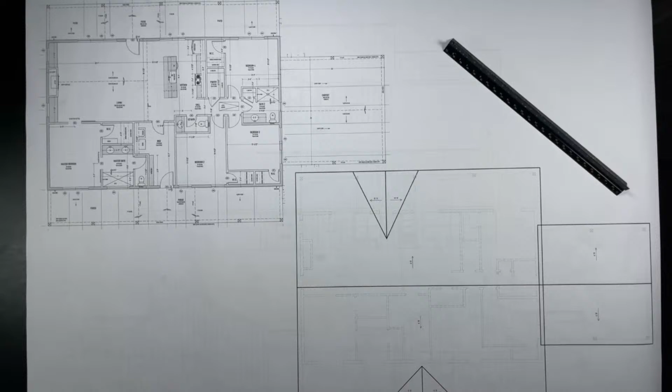I am a person who is obsessed with framing. I am here to teach you guys everything I know about how to take a plan like this, put marks on it so that we would understand a framing layout. That is why I'm here. Hopefully, that is why you are here, because that is what I'm going to go over today. Let's get right into it here.

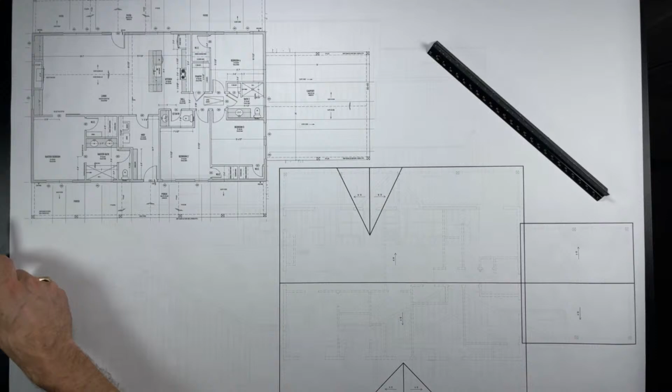This is a scale. I'm going to use it. It says 1/4 inch right here. This is how I know my lengths on my plan. Everything is printed at 1/4 inch per foot. So I'm going to use this to figure out my real sizes here. Okay. So the first thing, we're going to start from the top of the building and work our way down because that is how you work through a house.

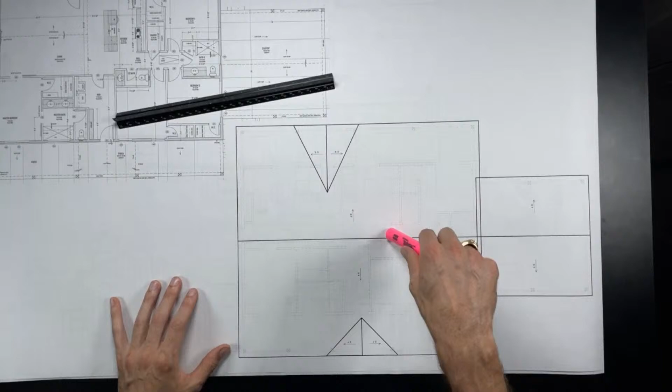This is the roof plan. From looking top down through the sky, you would see the outside edge of the roof, and then you would see the ridges and you'd see valleys, right? That's what these lines represent. So this is a 6/12 pitch running down the back of the house. This is a 12/12 pitch right here. They would merge along this line in this valley, right? Okay. So that is how that works.

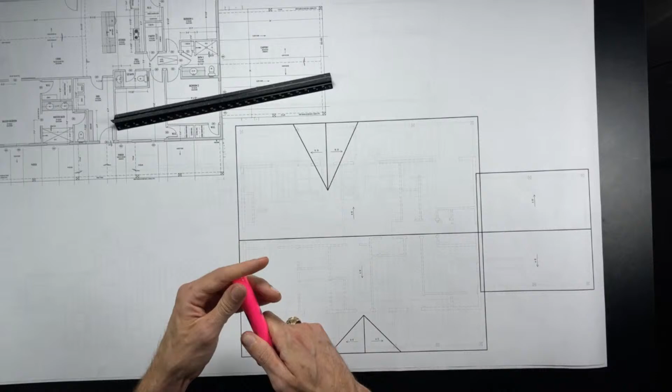What we're going to do is we got to figure out first how we're going to hold up our ridges, hips, and valleys. So let's take a look with yellow first because this is less obvious. So here's a ridge. We got to take care of this. We got a ridge over here. We'll take care of this. We got a ridge right here, and we got a ridge right here. We got a valley, and a valley. And we don't need to worry about holding up the outside edge of the roof because there's walls for that. Okay.

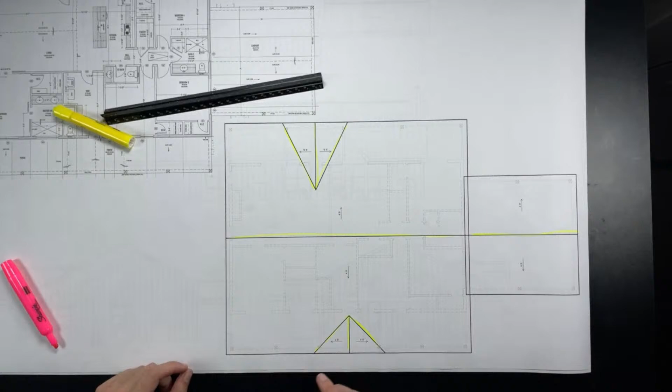So before we really look at the ridges, hips, and valleys, we're going to think a little bit about our rafters on this house here. Okay. So the rafters are the dudes that are making the main diaphragm or the main surface of your roof. They would go something like this. If you're looking top down and the house was framed up with no sheathing on it or anything, it would look like this. Okay, so there's some rafters.

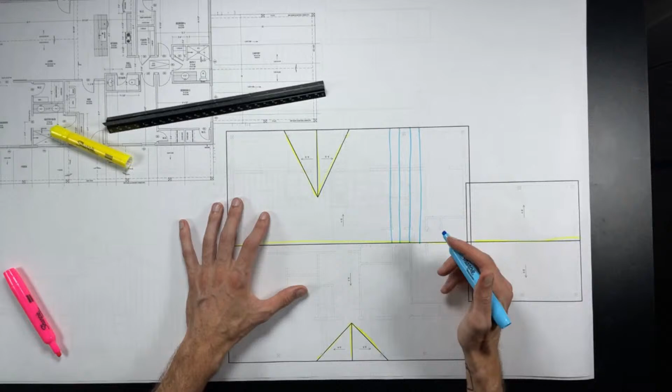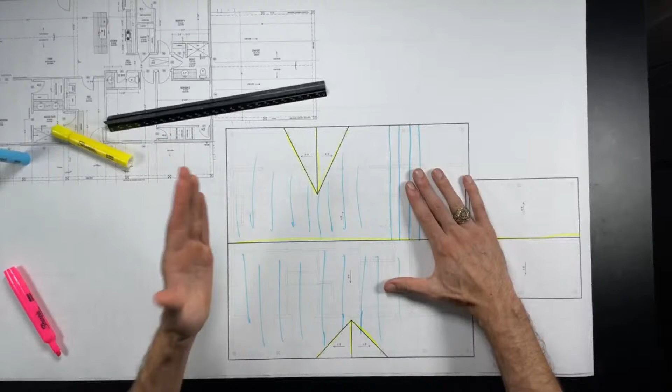So they're going to go this direction on this side. They're going to go this direction on this side. They're going to stop with these valleys, and these valleys are going to be real. Actually, we're going to get to that. But that's what the rafters are doing. And so what I need to think about, because this house is so simple, this roof is such a simple, clean, like farmhouse, just like boom, gable end, ridge right down the middle, and two cute little pop outs. We're going to talk about that.

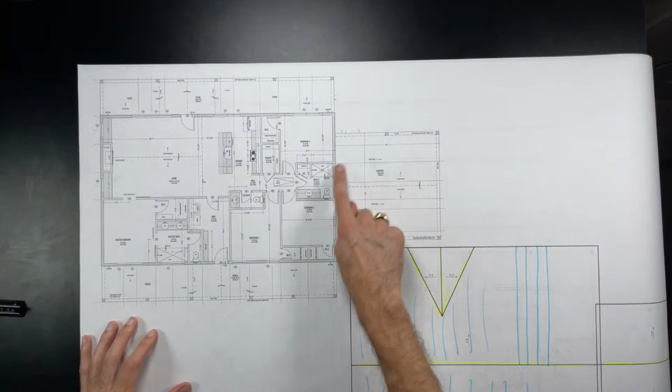And I forgot to give you guys the tour. Let's have a little tour because I printed out these plans. So let's take a look at what I got. Okay, here's the floor plan. We got to wrap our minds around this house. What is going on in the house? Okay, we got a carport, vaulted ceiling. So there's no flat ceiling in the carport. We got a porch. Looks like it's 9-foot ceiling here, 9-foot ceiling here, and vaulted right here up to the peak. Centered on this door.

That makes sense. On the back porch, we have 9-foot and 9-foot. Again, another vaulted ceiling up to this peak. We have a vaulted ceiling at a 6/12 inside here. But that's actually going to be framed totally separate from this. So that's a new thing for us, I think, on this channel. So we're going to talk about this guy. We're going to have a flat ceiling. This line says the flat ceiling starts here.

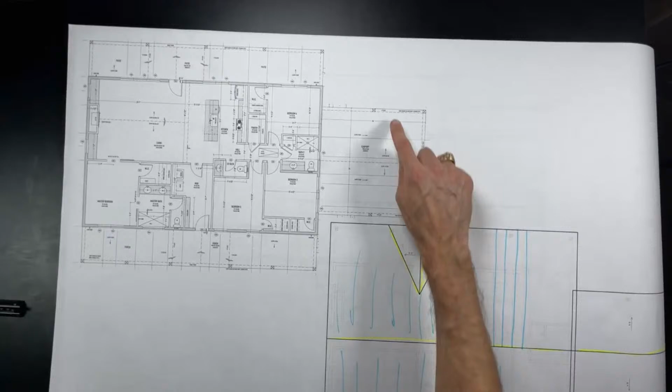10-foot ceiling. All the rooms are 10-foot ceiling. So the whole house, boom, is 10-foot ceiling. Porches, 9-foot ceiling. Carport, it's vaulted ceiling, but we don't know. Oh, it says 9-foot plates out here on the edges. So that's where the roof starts.

Now, if you had any doubts, you would look at your elevations. All right, here's the front of the house. Somebody put here on the plan, look, 9-foot plate height, boom, all the way across. You can see all the roof plane is in a line. There's nothing popping up or sticking out to make that different. Look at the back of the house, same thing.

We have a 12-12 on the back. Not much else is different. And then we got the left and right sides. Looks like this 9-foot plate's just all the way across, so the 10-foot ceilings all exist up inside this space. So you're not going to see anything popping out.

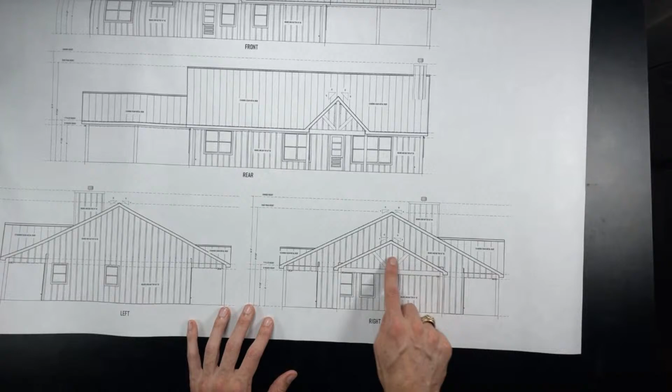There's nothing funky. And then here's the right side where there's this open carport with a nice, beautiful cedar thing that people like to build. Okay. So those are the elevations. That is the elevations sheet. So moving right into this here.

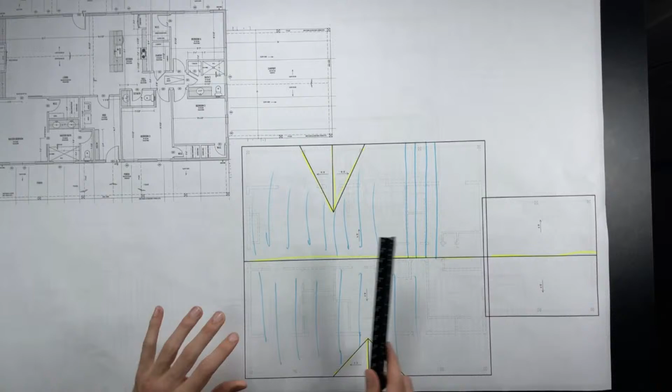If this is our roof, we got this side going down to the back, this side going down to the front. What are these rafters going to be? That is the question. So where are they framed? First of all, they're going to start on the outside porch wall on both sides, and they're going to run all the way up the roof until they hit the ridge. How far is that? If they were totally unsupported from the wall to the ridge, it'd be 24 feet, almost exactly.

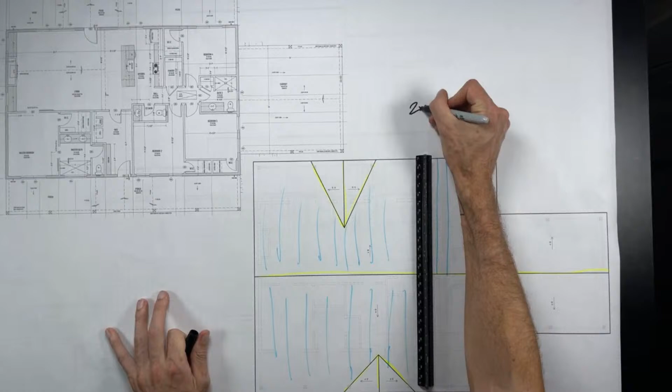That is too far for a 2x6 rafter, 24 inches on center, to span. We can go about 11 feet horizontally on the plan view before we need support. And so we also cannot support this in just one place in the middle either, because if we cut 24 in half, it's a 12-foot span plus a 12-foot span, and that's still both over 11.

So what I'm thinking here, folks, is a pretty common strategy, which is that this is a 6/12, and we've got quite a bit of height up in here. So typically you're not actually going to bump up the whole roof to 2x8s. What you're most likely going to want to do is run a framing support line along both the perimeter walls.

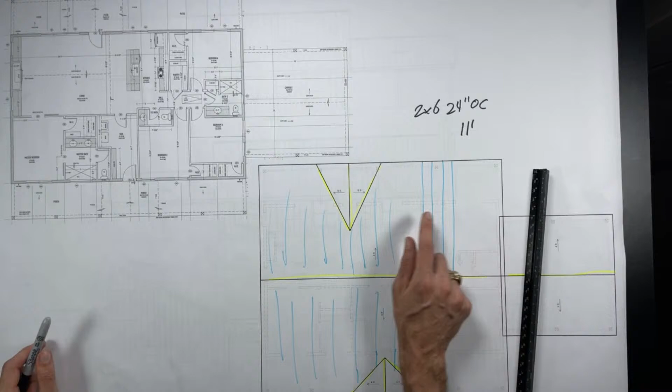So over here on the floor plan, we got exterior wall going all the way through, exterior wall going all the way through. So we'd run support right on top of that because it's super easy. We don't need beams. We don't need nothing. Let's add a line for that. We would call this a purlin line. It's representing a board the same size or greater than your rafters running lengthwise. And it's a support point.

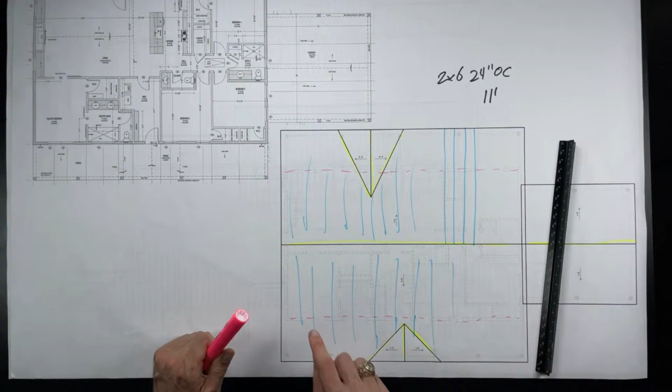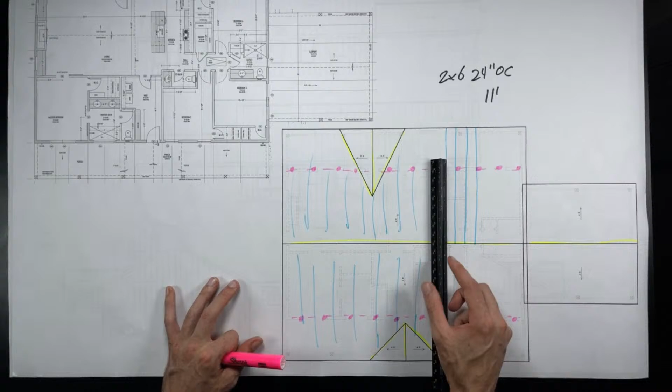And so all the way down this thing, we'd say every 4 feet, you're going to brace this sucker straight down. We'll talk about what goes on underneath here in a second. You would just do that all the way down, and you would not be concerned with much else. That would be super simple. What that does is it gets us over the porch, because the porch spans like 8 feet. But now from the purlin to the ridge is 16 feet. If we break that again, then we can hopefully make some stuff happen.

So along this whole house, we pretty much have this wall running through the middle of the house. I want to know if I could use that wall to bear the load of my roof without having to add any extra beams. How do I figure that out? We have to use some geometry, but we're going to figure it out, folks.

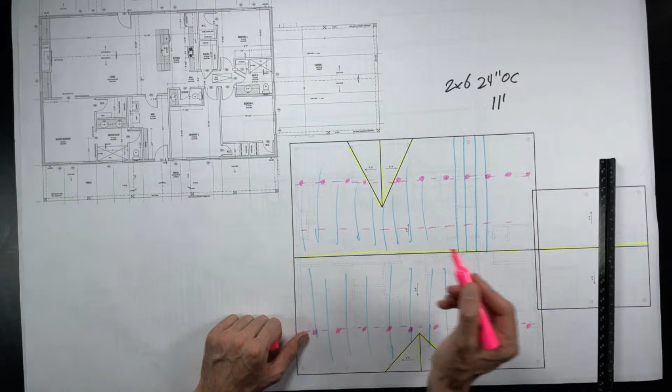First thing I got to know, starting on the back one, what is the max I can go? About 11 feet, so it's going to be about there. If I make that distance consistent across my plan, that's about where the purlin has to be. Now, in the worst case scenario, my supports need to reach from here all the way to this far wall, which is about 7 feet on the plan horizontally. So how would I know if I can run 7 feet horizontally?

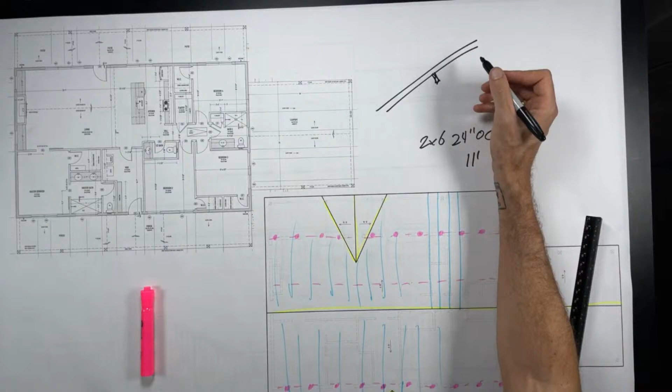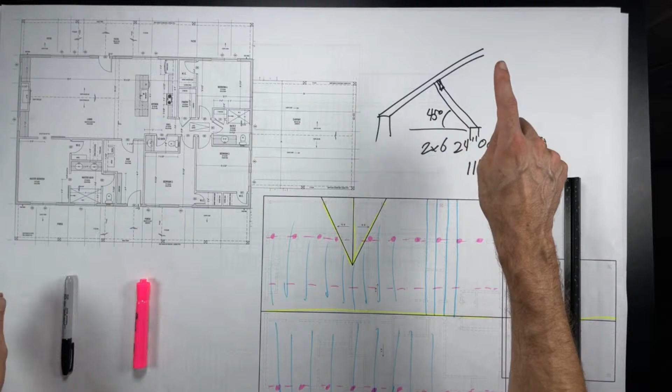We would use the rule that you can run a brace in a roof. So here's a roof. If this is the purlin we just drew, running the lengthwise of all these rafters, you could add a brace to it that braces down to a wall. This angle can be 45 degrees or more vertical, but you can't go slacker than 45 degrees without doing weird engineering. So how do we know how far we can reach? This pink part is the purlin location on the plan, and my wall is right here. The distance between those two is basically 7 feet.

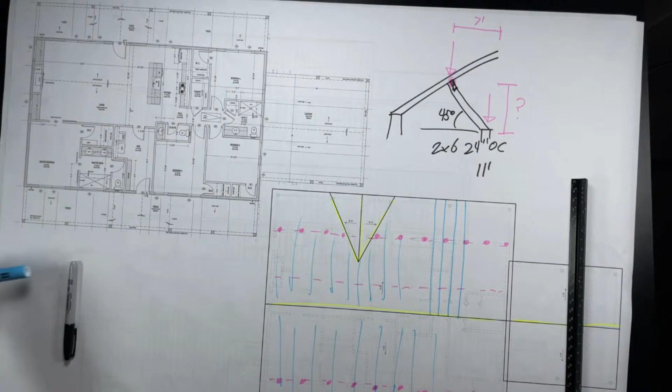Well, if I figure out how high I am from my support point to my wall, then I can figure out how far I can go. So how do I figure how high I am? Well, we do that by using the geometry of the roof. First of all, how high is this wall? Well, the entire inside of the house is built with 10-foot ceilings, so that wall is at 10 feet. We know that's the case.

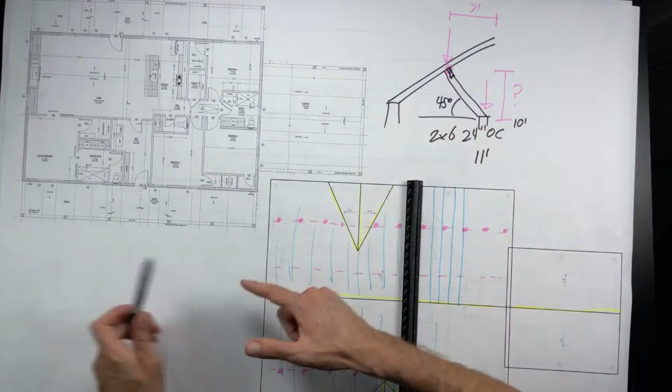All right. Now, how high are we at this purlin? How do we know how high we are? Well, we're going to start at the inside of the wall right here, and we know that this roof is a 6/12 pitch. So that means for every 12 units horizontal, we're going to go up 6. So we would just figure out how far over we are going to get to the purlin line, right? I don't care where the wall is. I care how high I am this way.

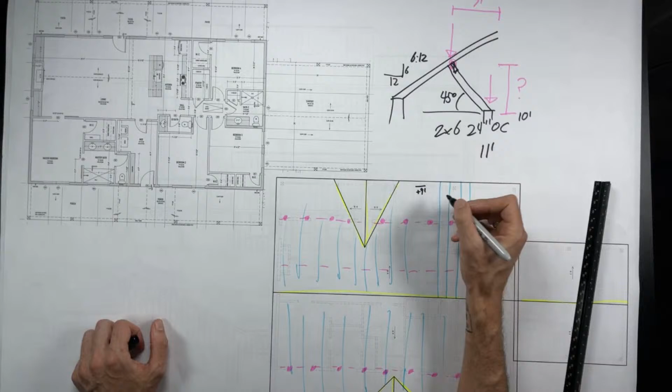So from the wall to the purlin is about 18 feet. So 18 is 1.5 of 12. So I'm just doing mental math in my head. You basically just do a ratio. If I go over 18, then I'm going up 9. All right. So from this point I'm going to go plus 9 feet. That is how much height I gain right here.

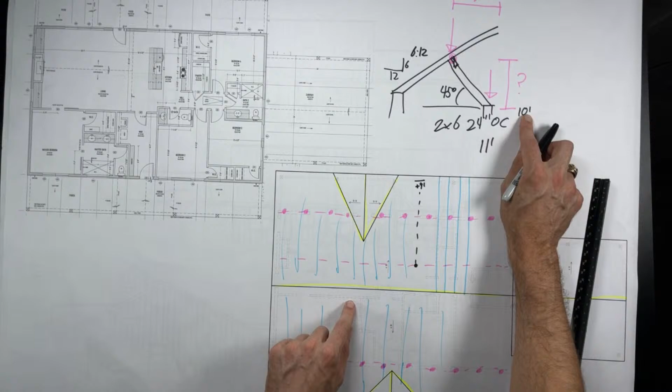Now, what that doesn't tell me is I'm not 9 feet above my wall necessarily, because this roof was built on a 9-foot plate on the outside of the house. So from 9 foot tall, I went up 9 feet, and now I am at 18 feet, which puts me 8 feet above my 10-foot wall at the inside. And because 8 feet is more than the 7, I can actually reach all my braces all the way over to this wall, and I know I'm good.

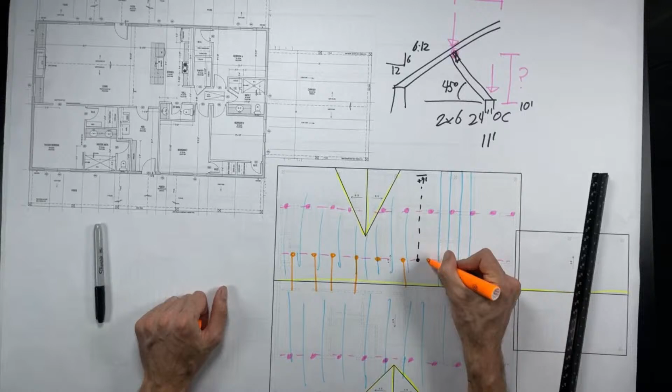Okay, so that one will just go down the wall, but I can actually draw it like this. And these braces are going to be pretty close to a 45, but it's not going to be a big deal because it all works out. The math works out. So I could just basically draw my braces. You may or may not be able to see these gray walls, but I'm just kind of putting the weight down there. All right, so that covers the back side of the house, except for the porch. We'll talk about that in a second. These little gables. Anyway.

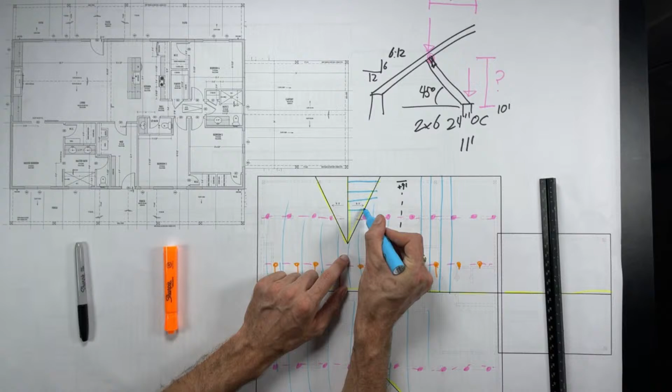You know what? Let's talk about that. Okay, so this is a vaulted ceiling back here, and the ceiling is vaulted to the same pitch as the roof. So what's going to happen is you're actually going to frame this. The rafters would look like this for the gable. They're going to go down like this, and they're not going to stop at the valley. They're actually going to go all the way to this wall in real life, at least to where the house is. Okay, and that's because you're literally making the ceiling of this patio room. So you got to do that.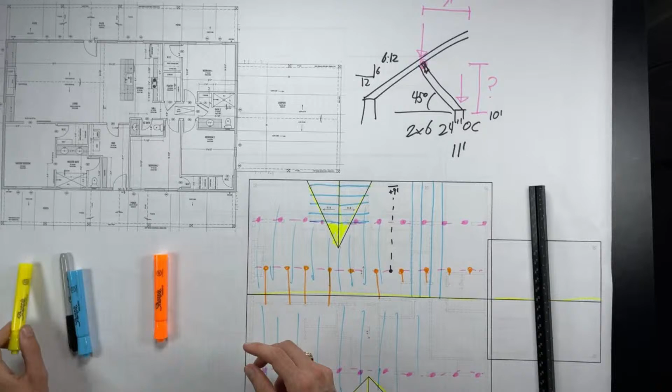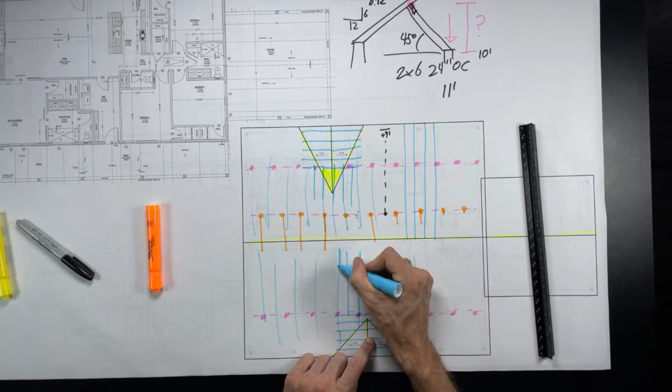So you built that. In this little area right here, this would be overframed. Okay, so that area is going to be filled in with blocking after you frame the main roof structure and this gable structure. And the same is going to happen up here. Rafters are going to go like this. You know, they're going to make this vaulted ceiling porch, and then these rafters are going to come down, and they're going to stop at this exterior wall, like so.

In this case, there's no overframe. Not really. I mean, there's a little bit of overframe from this part. Technically, yeah, actually there is overframe, but I'm not super concerned about that. So that's what's going on there. Easy enough. And those are really short spans, so we are not concerned with the length or the spans of those rafters. It is less than 11 feet.

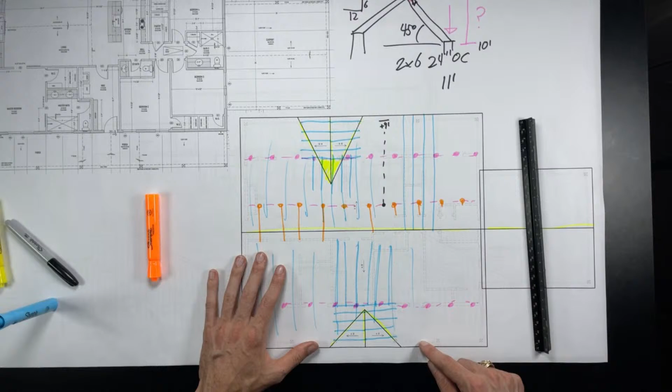Let's talk about this side. We've got the rafters covered from the front wall to this wall. That was only 8 feet. And it's too far from the ridge to this purlin. That's like 17 feet, too far. So we got to put another support line in here.

We happen to have walls all over the place in here. And so I'm just going to put this in here about midway because I don't really care where it is, because I know I've got support everywhere and I know I'm pretty high. I can reach up and solve all my problems. You know, these would go about 4 feet on center down the purlin. If I was a framer, this would be a nice, easy house. This is sort of plus or minus 4 feet on center, but that's what you're supposed to do.

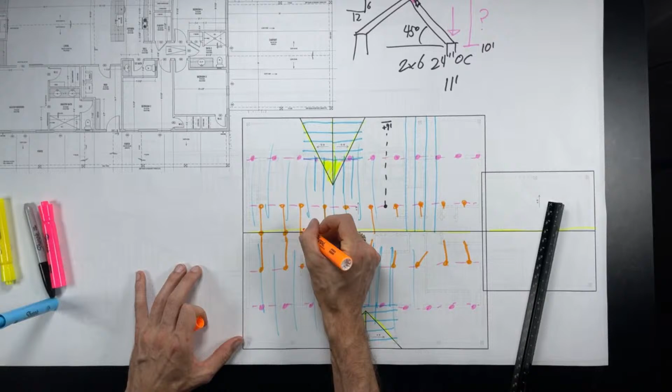Okay, so that would support this whole part of the roof minus the ridge. Haven't talked about the ridge yet. What's the secret of the ridge? Well, every 4 feet, we're going to want to support down to something, and we've got walls all over the place. All right, so the circle I'm drawing represents where we attach to the ridge, and the little dash I draw represents, hey, where does a brace land? Right, and it's going to land wherever you have a wall. We got lots of height up in the attic up here, so that would be super easy to do.

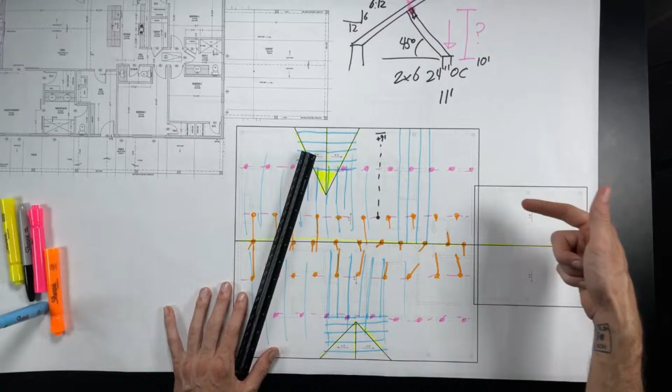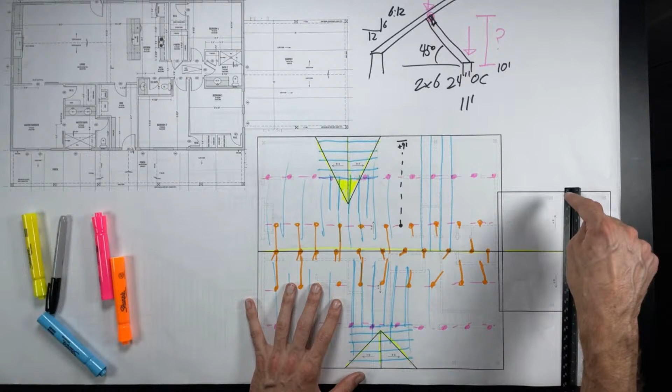Now, let's talk this little chunk, this little nug that sticks out here on the right. What is going on with this? Well, that's a vaulted ceiling, which means the rafters are the ceiling in this particular case. And we know that because of the view we looked at where it's like, oh, I can see the siding in this photo. Like I can see through this, which means the only piece of structure could exist in this zone. Therefore, I've got one shot, which means I can't put beams in. I can't put any of these purlins or braces in. I have to span from the wall or beam up to my ridge, which in this case is a little bit over 11 feet, and I don't like that.

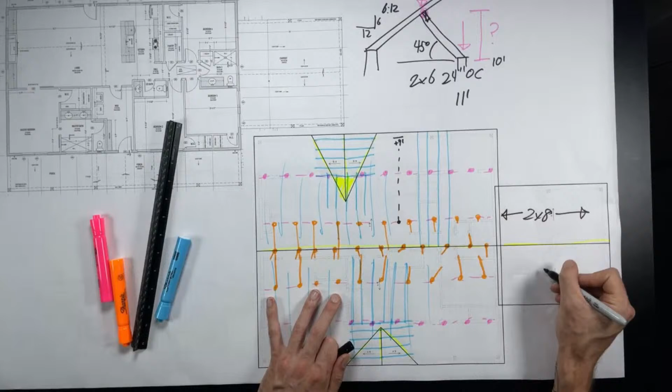Luckily enough for us, these roof planes are totally separate from each other. See how this upper roof does not interfere with this guy down here. So we could easily just bump up this whole section. We would say, hey, this is all 2x8s on this right here. And then the span would be totally fixed. Rafters would go like this. It'd reach just fine. And of course, if we needed to add beams in, which we do, we'll do beams in orange here on the roof plan.

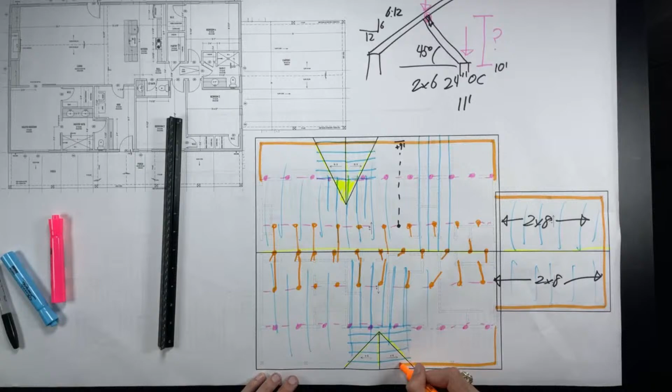There's beams wrapping the entire porch. That's what holds the roof over porches, is beams on the ends. Beam all the way down. And because we got these vaulted areas, something has to catch the vaulted ceiling. So there would actually be beams right there. Same right here. Okay. So for the roof, that's all we need to do. Pretty cut and dry.

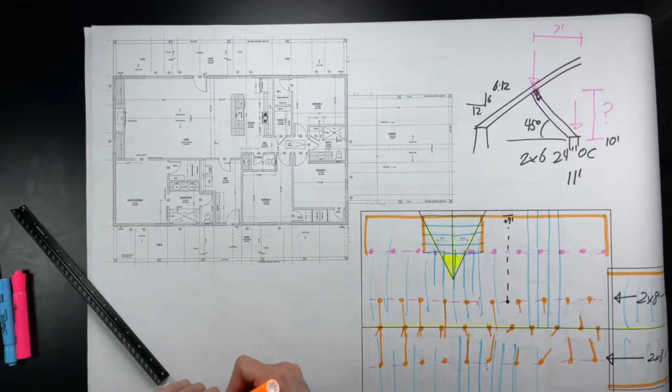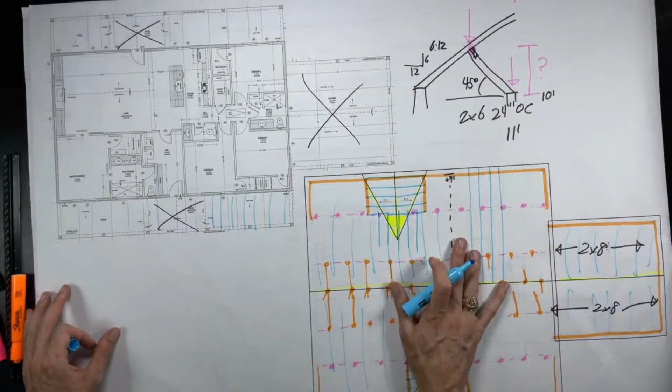What about the ceiling? Well, super easy. This ceiling is done because it was the roof. What's going on in here? Again, this ceiling is done because it was the roof. This ceiling is done because it was the roof. What are we going to do everywhere else? Flat ceilings everywhere else. Guess what? We're in line with the rafters. All these roof rafters, by the way, are going front to back across this whole big house. So we're just going to shoot these guys on in here. And what we're looking for is, are there any spans over 14 feet? Because a 2x6, 24 inches on center with regular ceiling weight, no attic loads, can go about 14 feet horizontal span without needing extra supports.

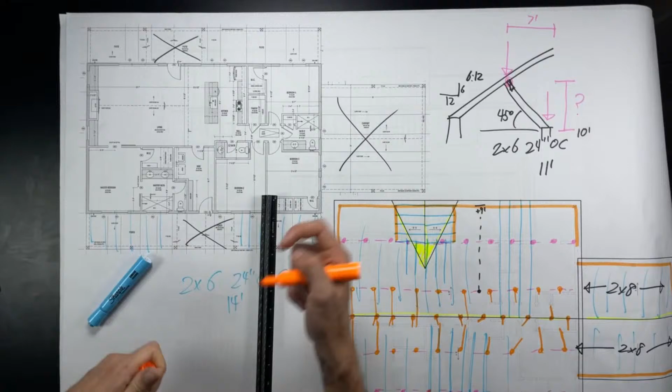So I'm going to look through here and check for that. That one's overspan. So I would add probably a little double 2x6 if I was framing this up. I'd put a little double 2x6 right there. This one, yeah, it's a little bit overspan. So I could either turn all the ceiling joists in this room. Well, I'll probably just do that. I would just turn all the ceiling joists in this room. These could go all the way across. Yeah, this can go all the way across. We can cross this room. We can cross this room.

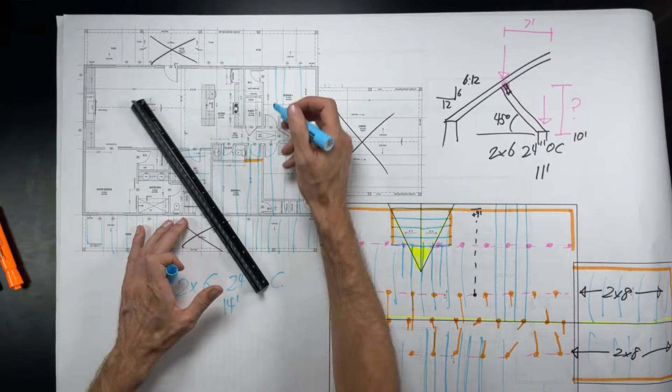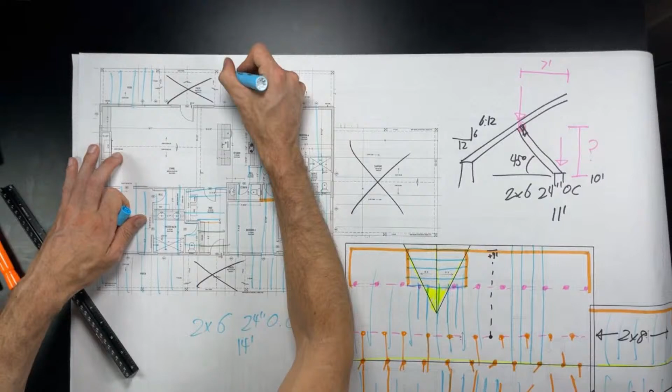Let's check for 14 feet here. Yeah, we're good. We can cross that. We can cross this. We would cross the hallway the short way. And then this open space in the kitchen, we'll deal with that in a second. We can cross the bathroom in the short direction, and then we can go this way. Let's check for span. Yeah, we're good. We can go 14 feet here. So that covers the ceiling. Let's talk about back here. Again, this is short. We're in line with the roof. We're going to run our ceiling joists just like that. We wouldn't put ceiling joists inside the fireplace, so we can leave that alone.

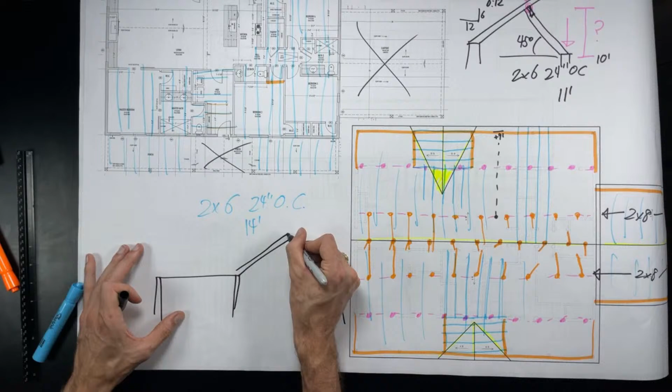Kitchen. Okay, let's talk about what's going on right here. There's a 10-foot ceiling, and there's a 10-foot plate vaulted ceiling. All right, vaulted ceiling. What does that mean? Let's draw. It means here's our kitchen ceiling. It sits on 10-foot tall walls. This would be a vaulted ceiling sitting on 10-foot tall walls. All right, your ceiling members are just going to go up to the peak just like so.

Now, what you need to know is whenever you vault the ceiling like this, unless you're going to do cool framing details like hidden scissor trusses and cool stuff, which I've seen and you can do, but don't tell regular framers to do that because they're going to ruin your house. Most people nowadays are just going to throw a nice big beam right up here on the ridge, just like that. And in the cross section it would probably stick down something like this.

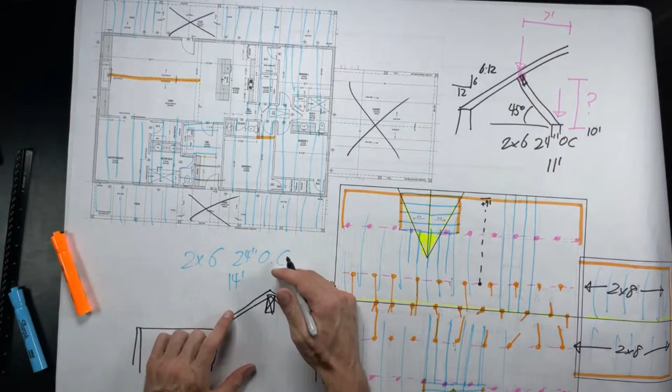Now there are ways, if you have lots of attic room, you could actually put the beam up here and then just kill the ceiling joist right in the bottom of the beam and then block in the bottom so it comes to a peak with no finish. But people like to usually see a member up here. It looks kind of appealing.

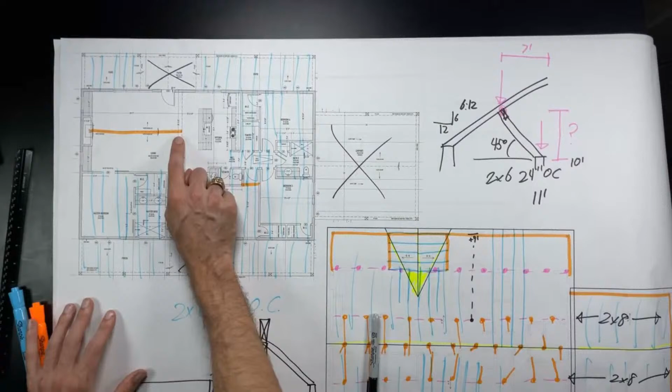So in this case, the beam that we put here is held up in the fireplace wall on this end, which is great news. But on this end, there's nothing holding it up. It's floating over an open room. How do we fix that? Well, we would put another beam defining this edge exactly where Mr. Designer said to put it, right there. And then we'd set the weight on top of this one and we'd be good to go. No problems. So that's how we'd solve that problem.

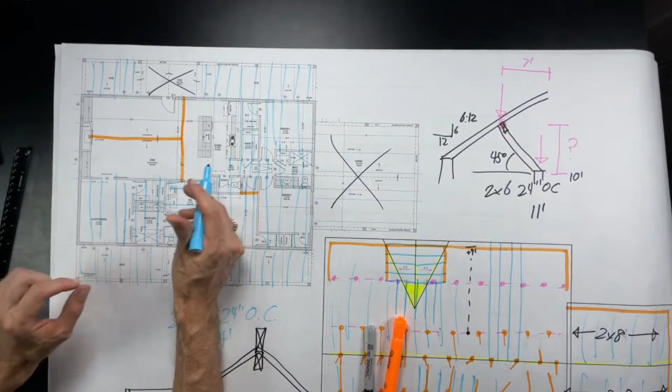And I was going to get to this because I know I'm putting a beam here. I want to check. Where'd my 1/4 inch go? Every time. I want to check for 14 foot across. I can, sure enough, just take my ceiling joist and do that. No sweat. Don't forget to box out your attic access door so you can get to your attic. But yeah, that'd be a super easy way to do the kitchen.

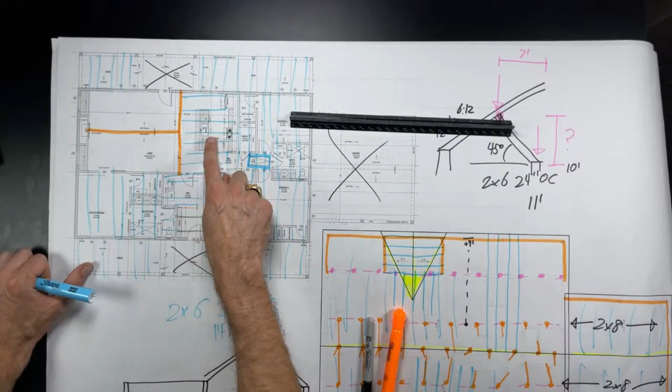Now, if for some reason somebody wanted to get up in the attic and store a bunch of stuff up here, well, that's slanted, so you're not doing it there, but the kitchen could be a good spot for storage. So maybe they beef that up to like 2x10s or something. It depends on how much weight you want to put up there. There's tables for that in the IRC.

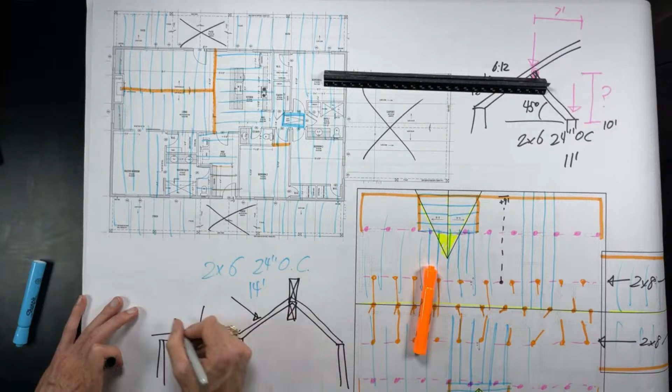And then the ceiling is actually going to be its own sloped ceiling joist, not a rafter, a sloped ceiling joist. Okay. Here's a flat ceiling joist. Here's a sloped ceiling joist, and the rafters live above the entire thing. And then this is your attic. That's basically what's going on in this house. So that takes care of the ceiling.

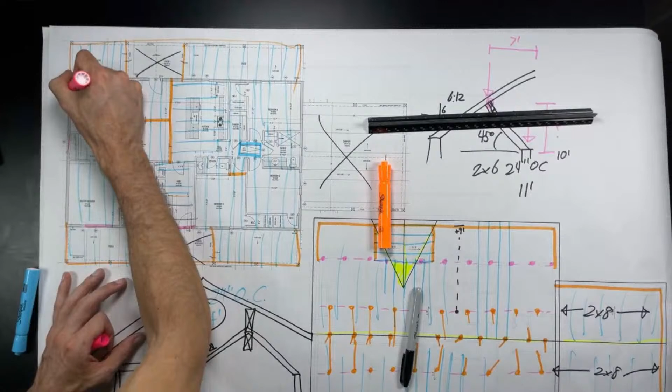We had all the beams all the way around the porch. You guys know about that. We had these beams here. Beam here, beam here. Oops, I missed beam there. Of course, we would always want to look and say, hey, where's all of our openings? We got windows. We got doors. We got all kinds of stuff.

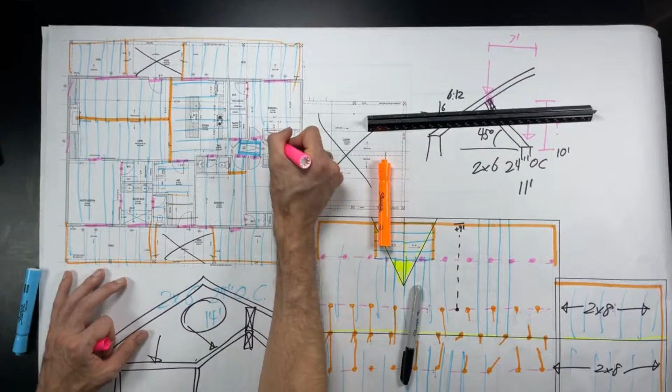Okay, anywhere there's a window or a door, you want to make sure that you are not forgetting your headers. If you have a beam that lands on a header, you got to check that out. Make sure it's a well-calculated header. There's no problems, right? So this is just a way to think about, hey, where's all the structural members going in my house? So yeah, that's pretty much it. This is a super simple house, and that is it.

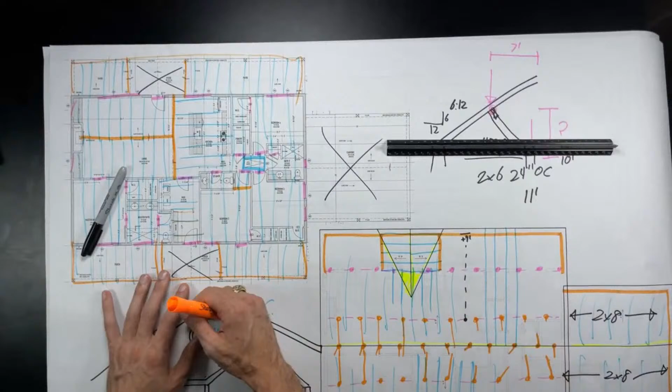So yeah, that's pretty much it, guys. We got the roof, bunch of purlin lines parallel with the ridge of the roof. Super simple. Ceiling, mostly front to back. Special vaulted ceiling in here. Simple, cut and dry house. Learning complete. Good job, guys.